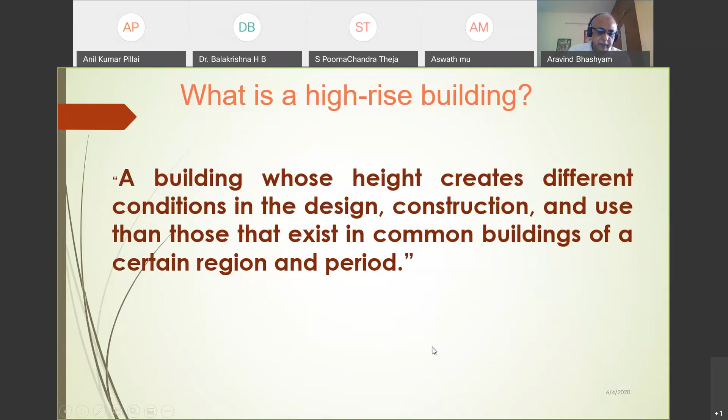So let's see what are the things that we did at that point of time. Maybe it had become obsolete, but it had a lot of impact at that point of time.

Now there is heavy demand for high-rise buildings, basically due to scarcity of land in urban areas, and also an increase in demand for business and residential space. Every country is trying to become a developed one, so there is economic growth, and in addition there's a lot of technological advancements happening and innovations.

Innovations in the structural system, and also a desire for aesthetics in urban settings. Everybody now, especially if you look at Hong Kong, Singapore, or Kuala Lumpur, they have this concept of city skyline.

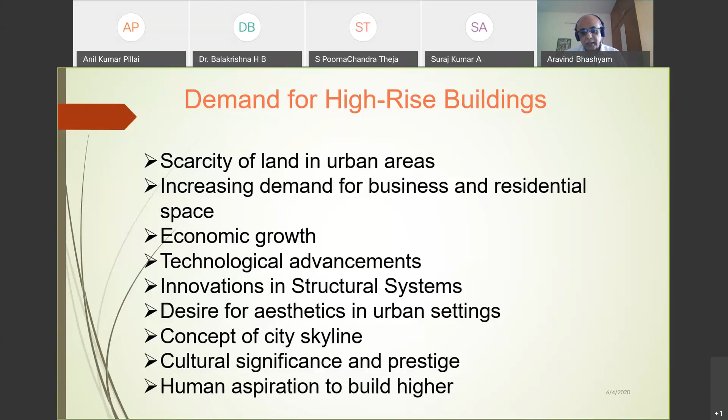You can see in history that the human aspiration is to build higher. That shows their strength - okay, I have a much higher building, so I'm stronger than you. So those kind of things have been there.

Most of us are very familiar with the type of loading that you have, that is the floor systems account for a major portion of the gravity loading, and also they influence the structural behavior and resistance. In office buildings you have long spans, while residential and other buildings may have a short continuous span. We have different kinds of flooring systems: concrete, pre-stressed concrete, steel, and may even have composite steel and concrete.

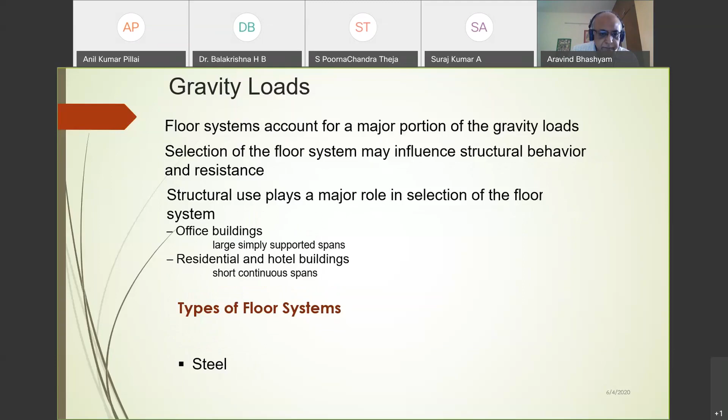You're also familiar with the kind of load that we have, that could be the wind load. Because the building was not tall, we have not paid too much attention to environmental loads like wind. Wind is a very specialized field now - many universities offer a master's degree in wind engineering.

Basically, to understand wind you need an interdisciplinary approach, bringing in fluid dynamics, structural aspects, and even architectural aspects. You will see how it makes a difference. You're all aware of the power law of wind load, how the load varies with the square of the velocity.

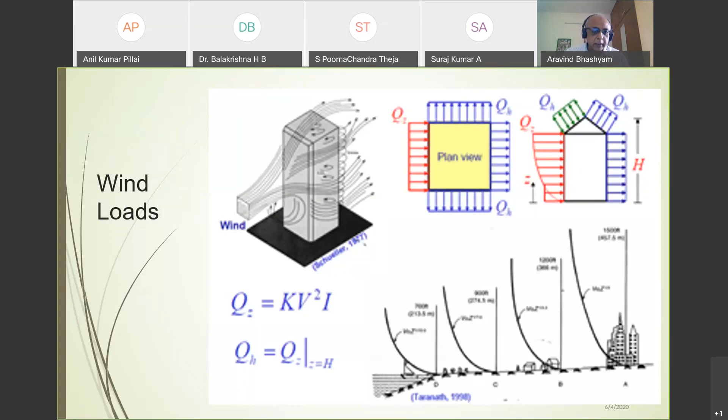I'm not going deeper into it, so any code will take care of that. The most important thing is this was work done by Fazlur Rahman. I would say he is the father of all tall buildings.

You see in this graph that as the number of stories increases, the cost per floor increases drastically. If you have an ordinary building, the difference is about 40 pounds per square foot. That shows there is a premium for height. It doesn't come just like that.

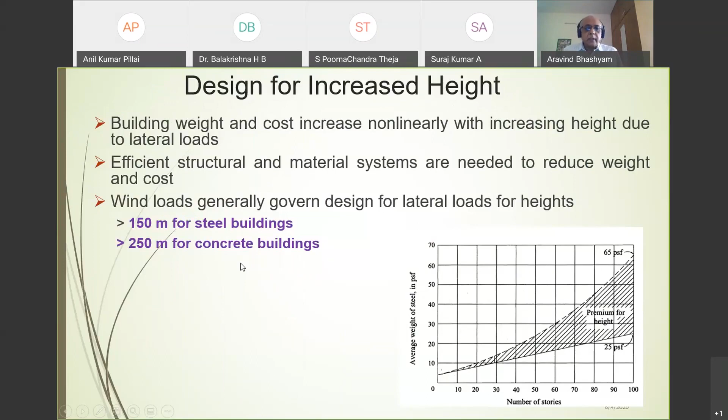You see that with increased height, for a steel building more than 150 meters in height, the wind load becomes the dominant one, and for concrete it is 250 meters where it becomes dominant.

There are various kinds of structural systems for such tall structures. You have a moment resisting frame, brace frame, shear wall system, core and outrigger systems, and you also have tubular systems - frame tube, truss tube, bundle tube. There are various kinds of structural systems you can adopt. Of course, you can make your own innovations.

A lot of things are coming up. It all depends upon how your architectural plan is and what type of environmental loads you have, and how you are going to tackle that.

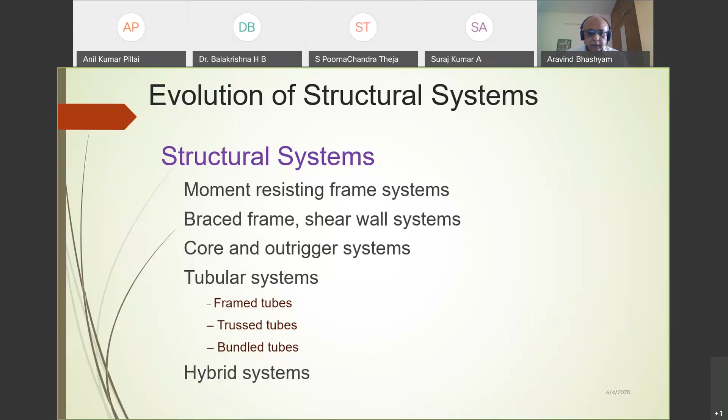Then you can also have a hybrid kind of system. This is Fazlur Rahman's work, which shows different types of structural systems that can be adopted for different heights of buildings, the number of floors. You can have a semi-rigid and rigid frame, then frame with shear truss, frame with shear band and outrigger.

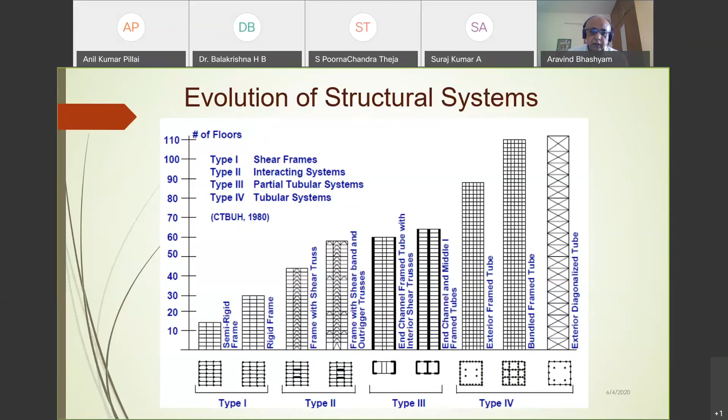Then you can also have a frame tube with interior shear trusses. Similarly, you can have brace frames, and as you go further you can move towards the tubular section. These are the various kinds of structural systems we have, evolved over a period of time.

Now, with this background, let's get into the Petronas Towers. The innovative aspect here is the design and installation of the sky bridge connecting the two towers. That is a very interesting aspect of it, which required careful analysis. You'll see the video later and see how the original design was and how it was modified later.

At that point of time, in 92, 94, Malaysia did not have the technology to do high strength concrete. So one of the requirements laid out by the Malaysian government to this company was that at the completion of the Petronas Tower, they should hand over the technology of making high strength concrete. That was in the mid 90s.

There was no technology to pump concrete to this height, which also demanded an innovative response. That's where a German company came and helped resolve this issue. The next challenge was a highly irregular soil condition, which demanded innovative engineering and construction strategies for us.

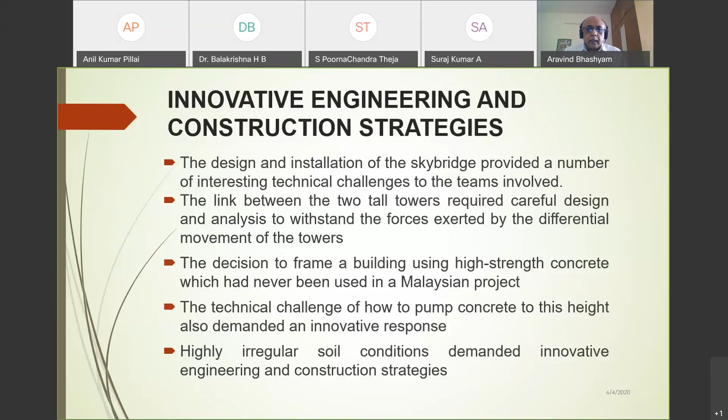This country is located just north of the equator, and it experiences southwest winds from April to October and northeast winds from October to February.

The wind was probably the dominant load in designing the Petronas Tower, because this region is not prone to so much seismic activity, though of late they're revising their maps. Certain kinds of activities had happened earlier, but going to the record, it was never as severe as in Taipei, which is seismically very active - you can expect an earthquake there every minute.

The problem posed was by the subterranean porous limestone cliff rising beneath the sandy and thick soil formation, what they call Kenny Hill - the local term used in Malaysia for that kind of soil. This had a major impact on siting the foundation design of the Petronas Tower.

Actually, the original location was a cricket field, and later that was used as a horse track. So that was the original location.

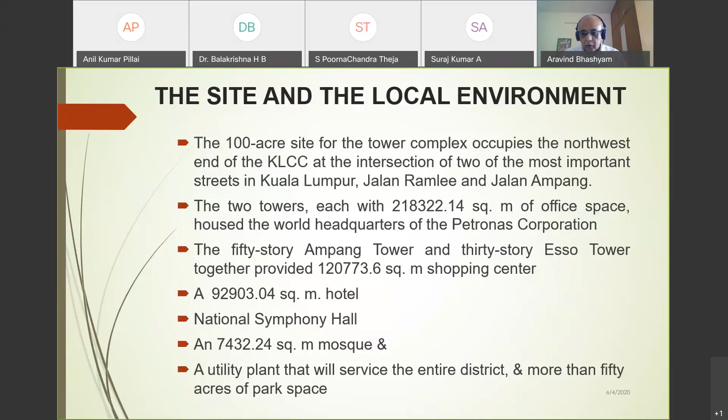It houses the headquarters of Petronas Corporation, the major oil and gas corporation of Malaysia. To support the services, there's a tower next to it called Ampang Tower, with a shopping center, a symphony hall, a mosque, and a utility plant serving the entire district. The whole area can be thought of as a district—huge space, grown up vertically, with more than fifty acres of park.

As I said, the site for the Petronas Tower had to be moved approximately 61 meters to the southwest after intensive geotechnical and geological investigation. We noticed that at the original site there was a porous limestone cliff that dipped down to a depth of about 120.4 meters. This was very difficult for the piling work, because the pile length would vary and could cause differential settlement. Second, the composition of the limestone cliff was also a concern.

At that point we took a call and said, let's move away from this, because it was prime land and the Prime Minister wanted it housed there, as it's sort of the heart of the city. We investigated and found that about 60 to 70 meters from the original site, we could locate the tower, and the piles on which the building rests would not reach the rock. We estimated we'd save about $20 million in foundation costs by moving to the favorable location.

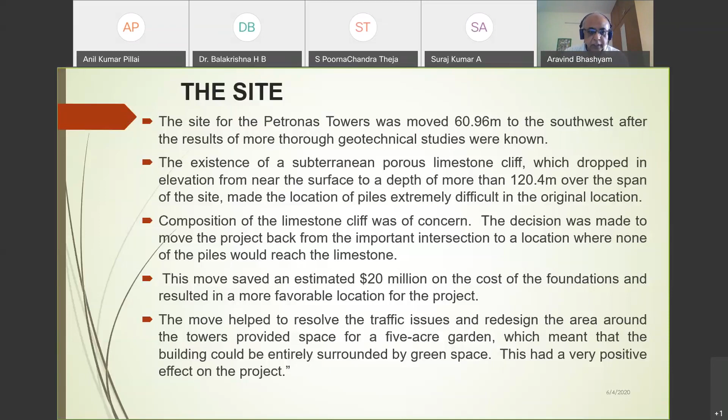This had a very significant effect on the project; otherwise everything would have to go around to reach the site. Also, during concreting, both at the foundation and the tower, we wanted a continuous flow of concrete, meaning a one-way path for trucks to park and move on. There was a specified wait time for each truck, after which the concrete could not be used. So by changing the site location, we addressed some of the geotechnical and transportation issues during concreting.

Now look at the architectural design. It's a delicacy of a local wooden screen combined with the richness of traditional weaving—what is called Songket weaving. It has been cherished for centuries and worn by the royalty of Malaysia.

Cesar Pelli, the chief architect of this building, is from the United States and had no idea about Islamic culture. On the suggestion of Prime Minister Mahathir, who handpicked him, he was told: why don't you study this country and learn more about Islamic culture, to see if that can be brought into this building.

So what he did was tour the entire West Malaysia, and then he got some ideas. He looked at all the specialities of the Malaysians, especially the Songket weavings, and also he saw that 8-pointed star, which was a form used to generate the floor plan of the Petronas Tower. It created a repetitive pattern for the curtain wall, reminiscent of the geometrical forms that we have. It also increased the surface area of the towers and maximized the views. So that's how the whole floor plan evolved.

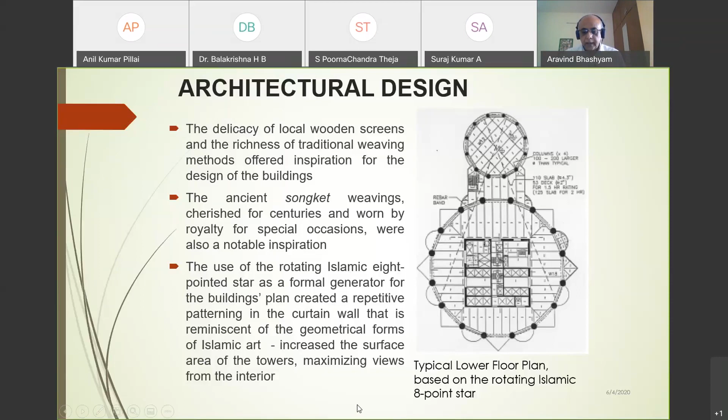You can see these columns here, and then you have the pointed things here. This is the typical floor plan obtained by rotating the 8-pointed star.

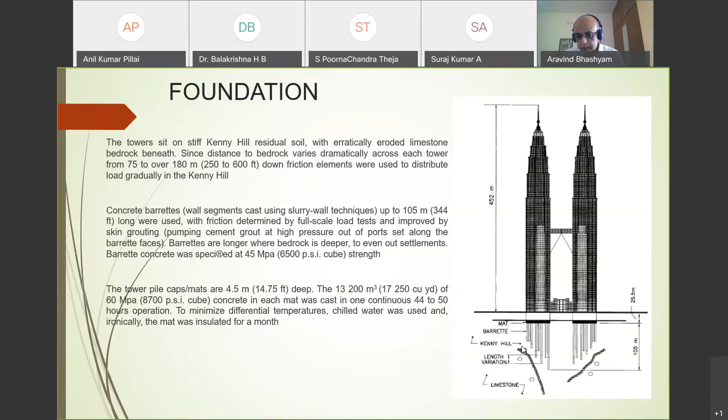The foundation: you can see here that the hill is just sloping down. So your pile will be founded onto this. This is the location of it. It actually cleaves down like this.

So now if you look at the soil and foundation, it has irregular bedrock beneath that. And it has a diaphragm wall about 2.5 feet thick, 30,000 metric tons per tower, spread over this concrete. You can see that the whole thing has been piled. And it has a 2-raft foundation about 15 feet thick, containing about 13,000 cubic meters of concrete. This is how the tower rests on it.

You have 208 barrette piles, rectangular, 9 feet by 5 feet, ranging 197 to 380 feet, to control settlement. The length varies because of the dip in the cliff.

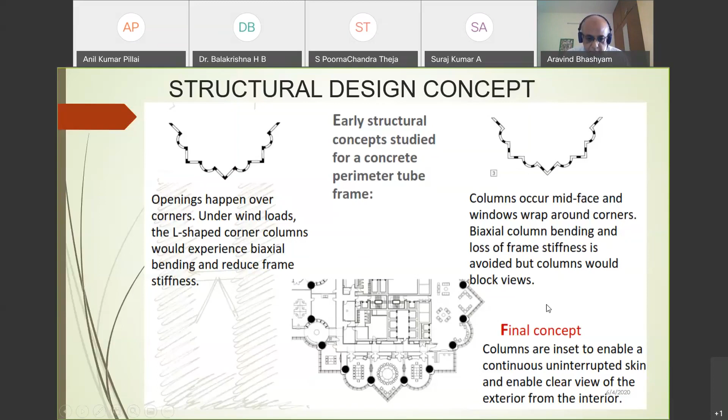So what we did was have the column move around like this, rotating this circle, so you get columns like this. When you rotate it, I can have at this junction the column project out so that this is open to the view, and you can have facade here in this region. That's how we evolved a structural form by rotating the star and placing the column onto this.

These are circular columns around us, and then you have the shear wall inside. Now the one core central unit is for the lift and tower exits and mechanical services, etc. It has the bustle stairs and non-structural walls, and there would be less effective cores along the top. So that's how the structural form evolved.

Now you see that the form that evolved formed a soft tube. Many times we neglect the in-plane stiffness of the floor slab, but it has a tremendous in-plane stiffness that can be used to resist the lateral stress. So this is what we made use of in order to resist the lateral loads on this.

So we formed soft tubes around that, and we also had that kind of floor slab placed around. At this point, the column was sloped inwards, and I'll show this a little later how it was done. The tower is supported by 16 cylindrical columns placed in the inner corner in a star shape, and it steps back 6 times. You can see here, it steps back 6 times.

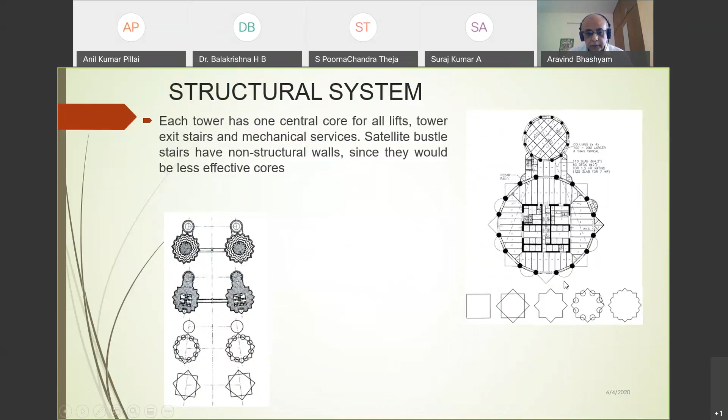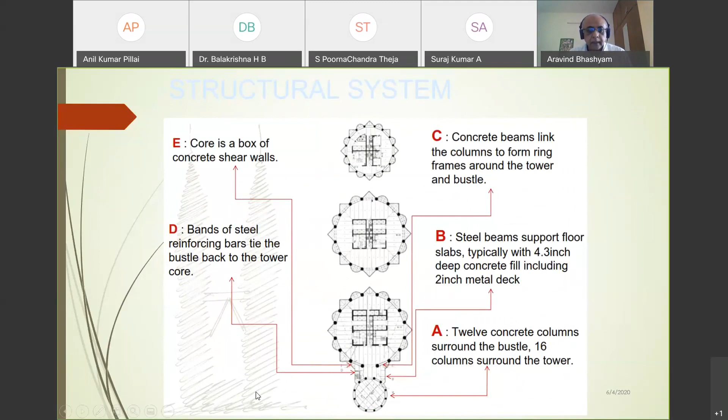You can see these are the steel beams running around this. This is composite in nature. And you have this column supporting this. So this is how we evolved this tower and the adjoining one into this. Now this is where we had the core shear wall around that. So this is how the whole structural system was formed.

But in that, I need to cater for the wind load also, that is a prominent one. If you look through this structural system classification for tall towers, there are a lot of papers published, but the important ones are by Fazlur Rahman, and the other one is by M.M. Ali.

M.M. Ali is also from Illinois Institute of Technology. What you see here is they classify the structural system as external and internal. When you design a multi-storied building, you design such that you don't differentiate between lateral load and the gravity load — the entire load is taken by the framing system. This is okay as long as the height of the structure is okay. But as the height increases, the same kind of system may not be possible. So we try to see the separation of this — having a separate structural system for the lateral load and the gravity load, and somehow interlink them so that it helps.

So here we use the concept of the outrigger. This has been there for a long time, especially when you look at boats. They have these outriggers, which tend to balance the boat as it's considered, spread out, giving stability to the boat as it travels through.

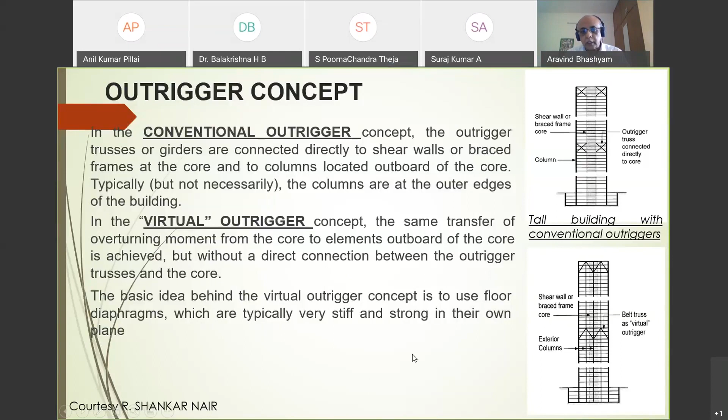So the idea behind this virtual outrigger concept is to use the floor diaphragm, which is stiff and strong in its own plane. That's why I said we have taken the in-plane resistance of the slab into account to render this. This was the idea given by Shankar Nair, who is in the US, so the same idea is being used here. So there is an advantage of using this kind of belt truss.

You can see here, this is a floor diaphragm. These act as the bottom chord, and this acts as the top chord, with members in between which get connected. So we need to locate the outrigger columns where they can conveniently engage with the truss. That's the advantage of this.

And when it is braced, this is where the transfer of forces takes place between the floor diaphragm and the shear wall or braced frame. The complicated truss-to-core connection is eliminated here. And if there can be differential shortening or settlement between the core and the outboard column, this outrigger is able to balance that because it is stiff in its own plane. That is the advantage of it. But on a vertical plane, it is very flexible.

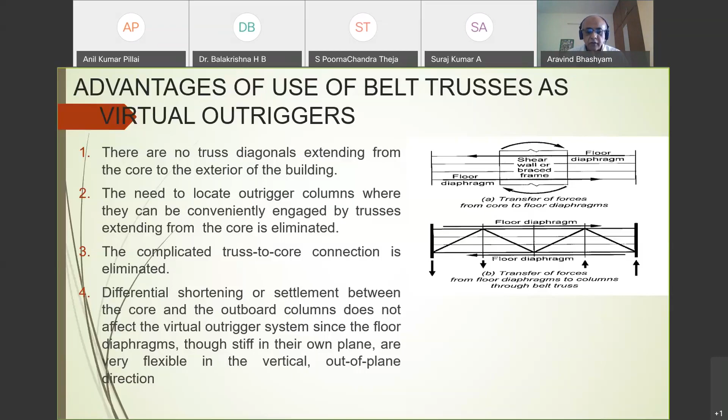We wanted something to be in plane, and it should be very strong so that it can transfer the forces. At the same time, vertically, it is flexible enough to do that. So that's the advantage of this.

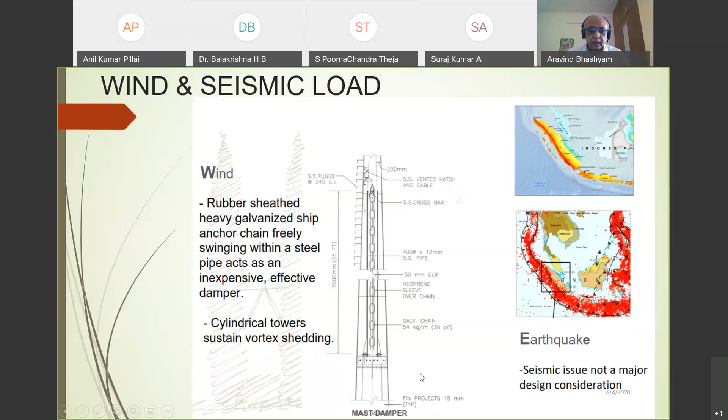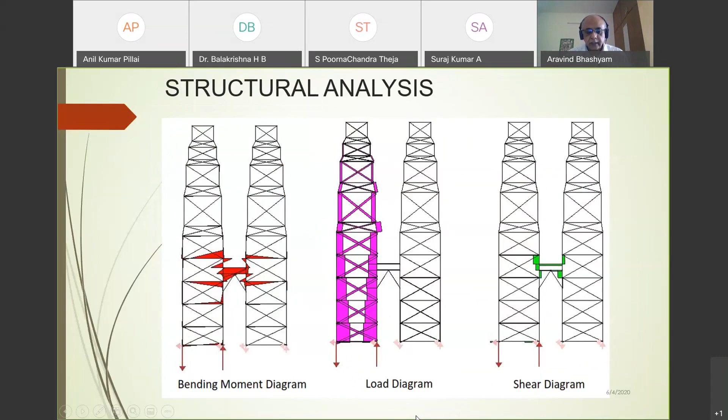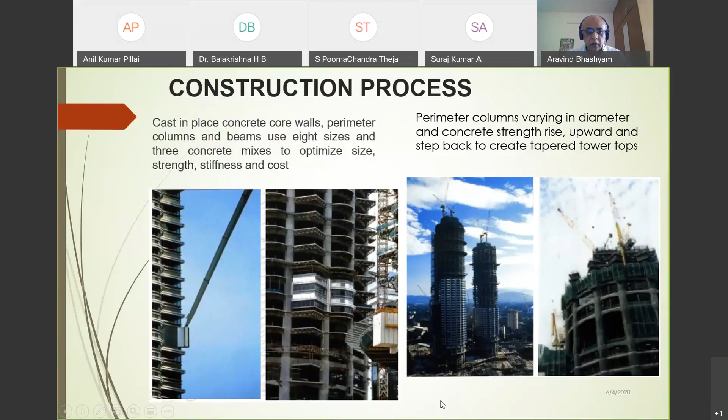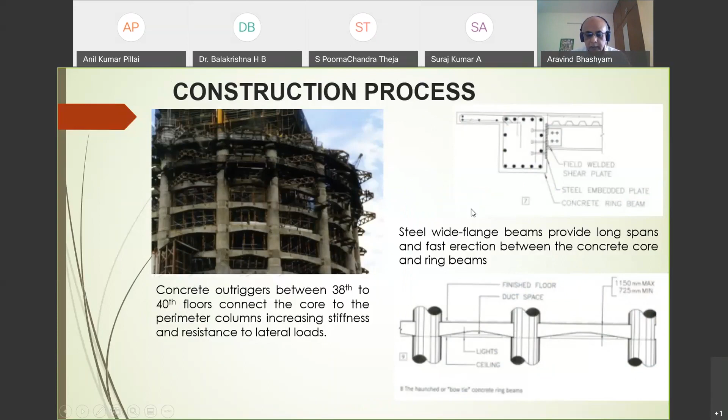The concrete outriggers between 38 to 40 floors connect to the core perimeter of the column. So that increases the stiffness of it. This is basically how it was detailed.

Now, coming to the whole concept of this tower, the initial design was we had 2 towers with a space between the two. So the architect looked at it and said, somehow I need to bring harmony between these two towers, because they can't stand separately. He said, I'm looking at the sky, I'm looking at the universe, so let me have a way of saying that. Let me connect these two with a bridge. That's what he wanted - come up with an idea of how these two can be connected with a bridge.

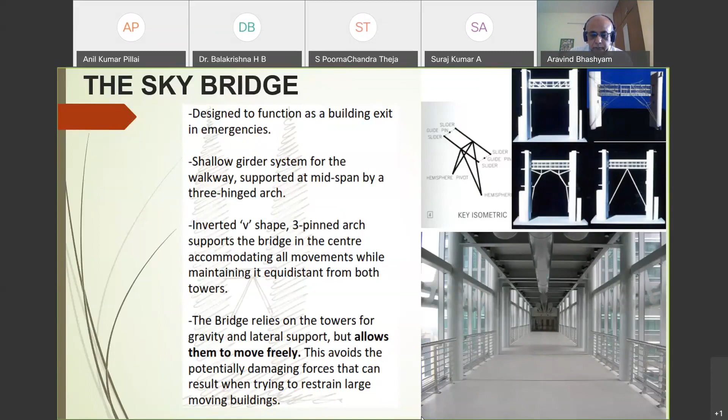So now you need to have a bridge which would allow the free movement of the support. That means I need to have a hinge here - you can have a hinge or you can convert it into a 2-hinge arch, that's also a possibility. So what we thought was, why not make it a 3-hinge arch principle, so this is on a hinge, this is on a hinge, this is on a hinge, connected here, and this abuts the tower but is not really connected to it. So if the tower moves in different directions, this bridge will remain as it is - it will not be twisted.

So each leg of this spans from a spherical bearing, which allows the rotation. You can see here, this is how it is.

It rotates the whole thing onto that spherical bearing that you have. And the wind forces are important for this design consideration, not only for the design but even during the erection.

You'll see what kind of problems we faced during the erection. So this is how the structure was conceived. We had three tuned mass dampers inside the 34th and 35th floor in order to reduce the vibration of the leg.

Basically it's an external damper fitted into the leg. So what happens is beyond a certain frequency of wind, the dampers become active, they absorb that energy, meaning they dissipate it so that the leg of the bridge is protected. That's basically the idea.

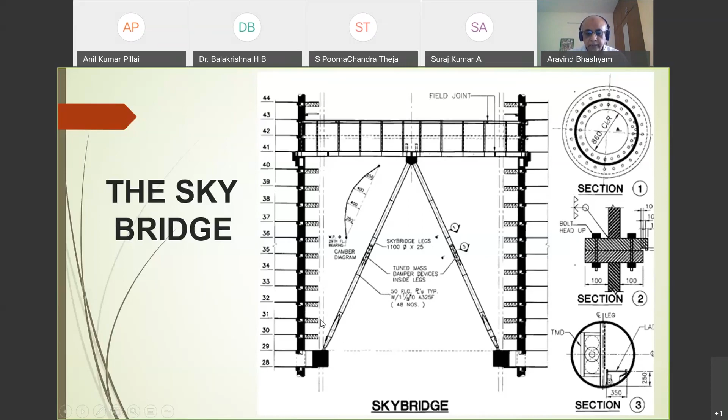So it's a double-deck bridge spanning 58.4 meters, connecting the two towers at the sky lobby elevator. Structural steel was used as it's easier to make and then transport to the site. We used two-hinged arch and continuous floor girders—it's a shallow walkway.

We have done tests for fatigue and also for loss of support, creep and shrinkage, and certain movement compensation that can happen, as well as for the bridge facade panel movement. All these things have been studied, and finally we arrived at the configuration of the bridge.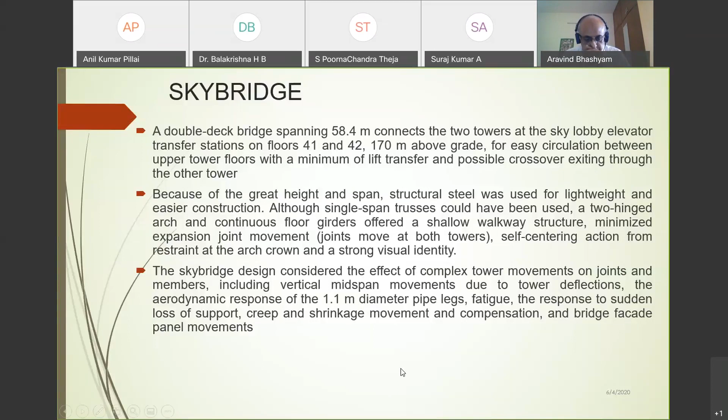Now I'll show the video of the erection of the whole thing.

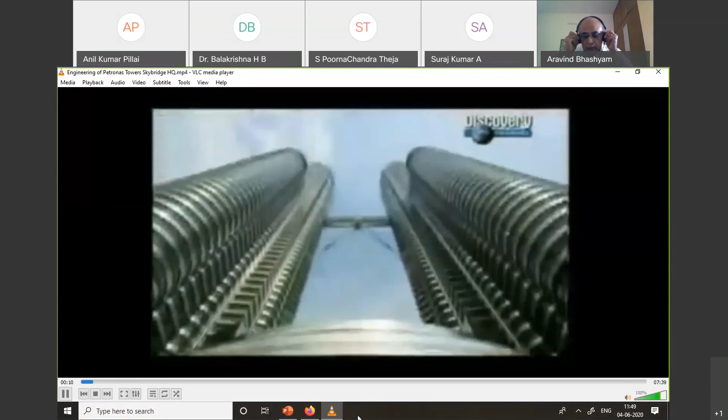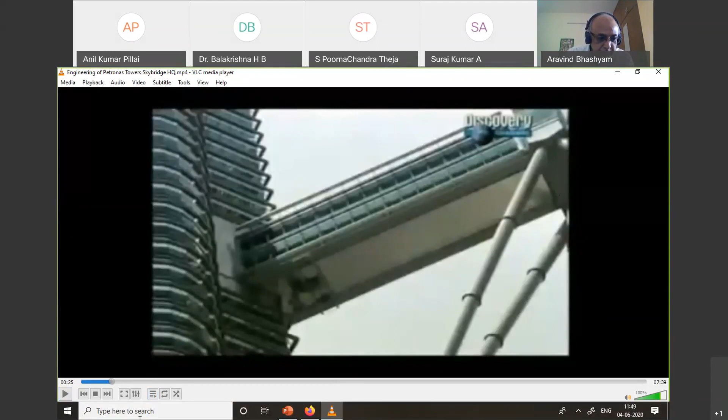This is actually the view of the Petronas towers, which shows the sky bridge. This is the leg which I said is broken into pieces and then assembled at the site. Now you can see how this whole thing is being developed here, with a bare steel frame around this.

Now you can see this is the leg which is coming here. It is fixed at this point, it is at the support, and it's supported. It just abuts the tower at this point and the tower at this point, and you have the glass facades covering all this. So this is basically a box, supported at these points.

Now, this bridge has a functional role in the sense it's connected to the towers, and it also acts as a visitor gallery. As it moves around, they can see the whole thing, the entire Kuala Lumpur city.

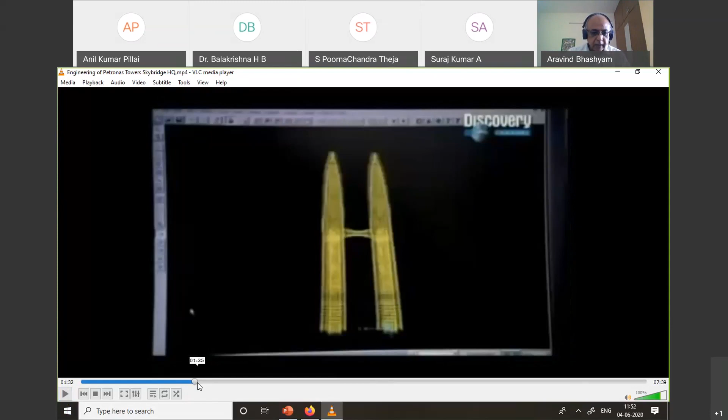Now this is the simulation of the tower. You see that the tower can move, and this allows you to twist the bridge. You can see the twisting of the bridge.

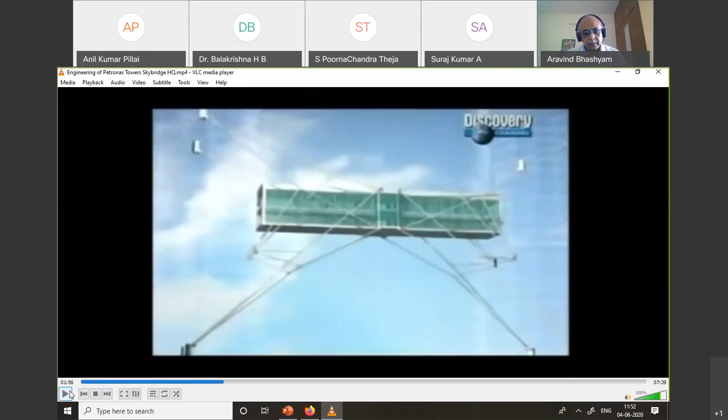But there is a gap here. Probably you can make it cantilever from this side, abut it at this point - absolutely no problem. But the whole problem is when the tower moves in two different directions, those regions get stressed more, and this causes the bridge to twist, because depending on the movement, one side can shorten while the other lengthens, or vice versa, and this causes the twisting of the bridge. If you have to design the bridge for this torsional effect, it would be pretty heavy and very uneconomical. So we looked at various alternatives.

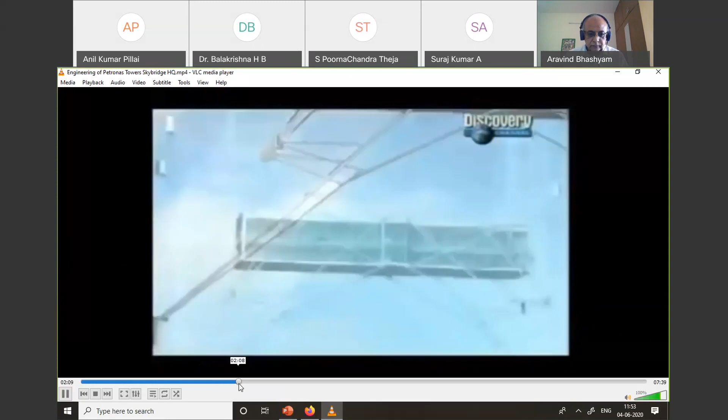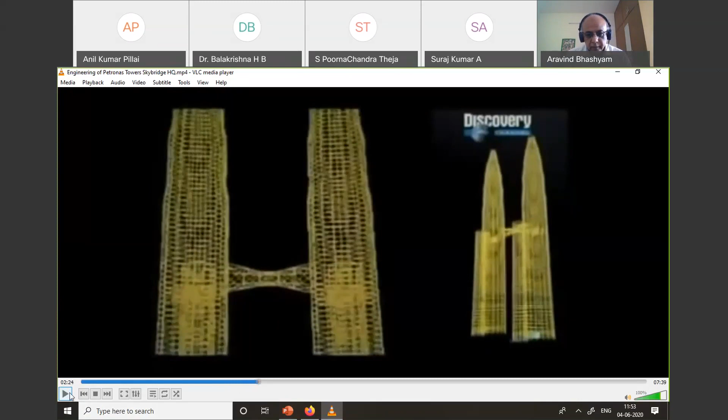Probably you can see the movement here, how the bridge is getting twisted.

So this is how we changed the design. Now you can see that at this point, just above the bridge, the tower has a fixed support. Then it comes down and rests on a socket ball bearing here. These are the various segments which can be assembled on this side and fixed.

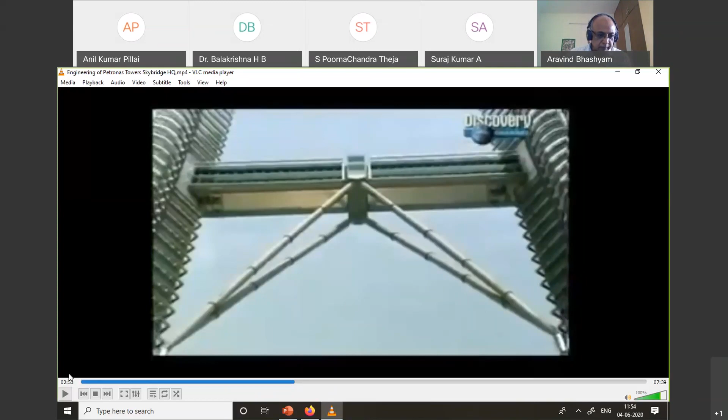But how am I going to fix it at this point and this point? What technology am I going to adopt? Suppose I fix it up to this point - how do I bring this to this level and fix it here? I can't stand in the air and bolt it in place. So we had to do some kind of simulation to figure that out.

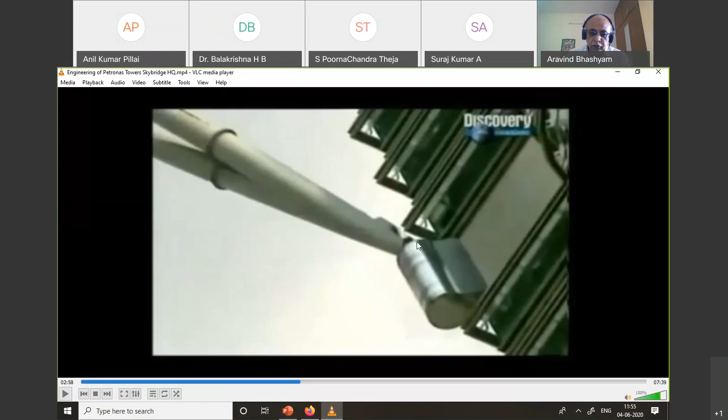Now you can see how the bearings work. This is the end bearing resting on this, which transfers the forces to the column, and then through this frame it goes here, where it's allowed to swivel about that particular joint. It moves around that.

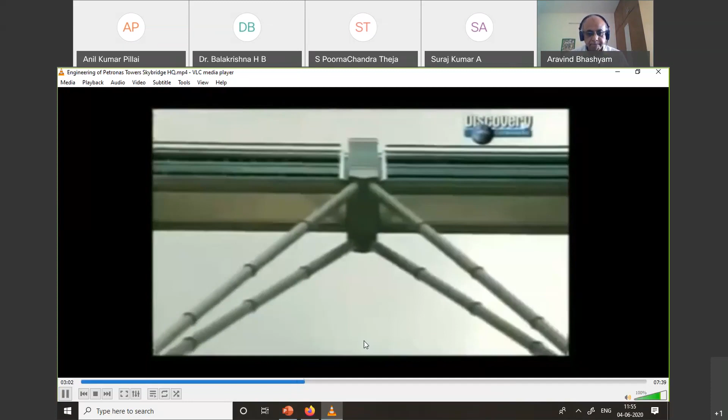So what he's trying to say is this is what we worked out - you have a bridge and you allow it to move so that you don't put strain or stress on the bridge. The tower moves freely, so the bridge also just slides along with it. It doesn't move along with us; it's able to slide. That's how it was done.

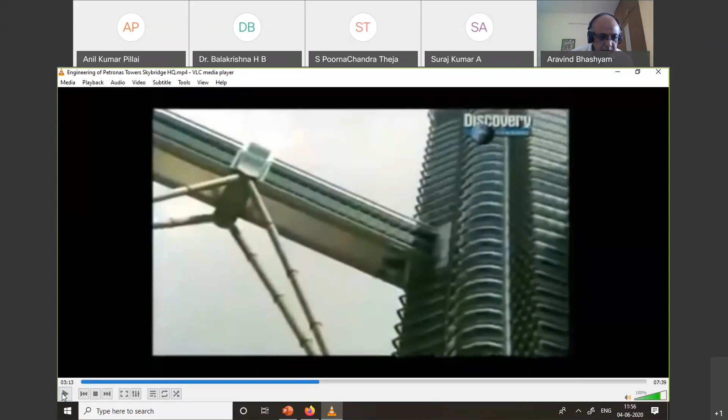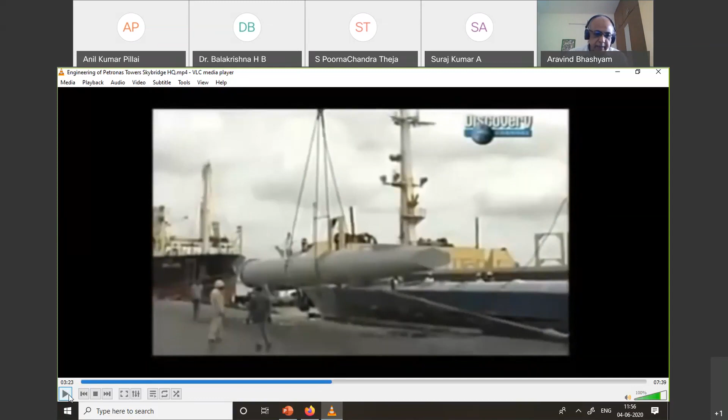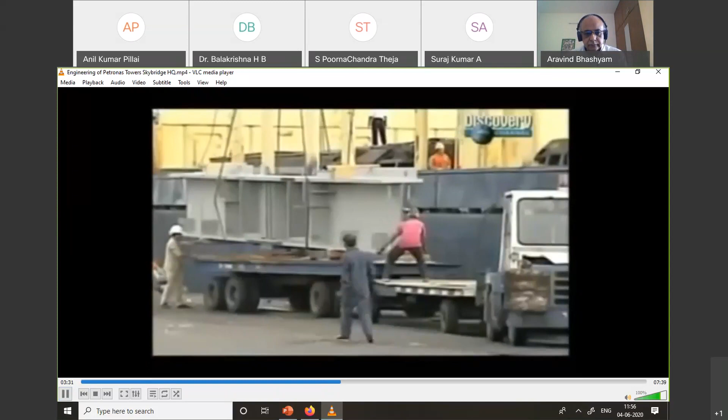These are the legs of the bridge, which were fabricated at Seoul, South Korea, and then shipped to Kuala Lumpur in pieces, where they were assembled at the site. The next important thing is when you break it into small pieces, make sure every element fits properly, with no hiccups when joining the elements together. That has to be ensured at the site.

Now this is what we did - this was assembled, and through the hydraulic jack, the bridge was lifted up to the height of the 41st to 42nd floor.

Then you bring it back - the legs which are there, you see that leg attached, you push it back and connect it here. Now, is it a simple exercise? We'll see.

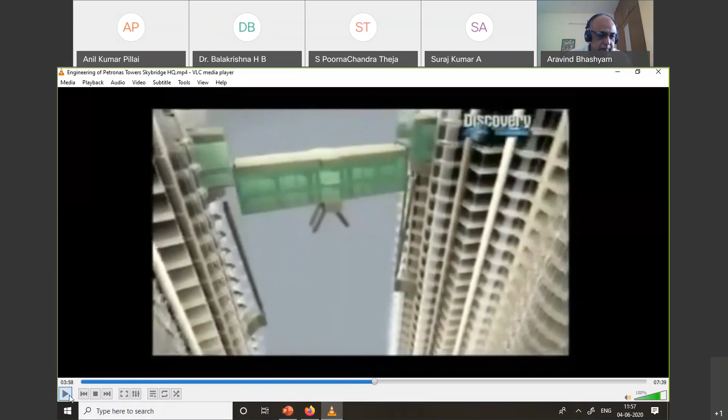So the whole idea is the joining will be done in mid-air. How are we going to do that? What kind of support are we going to have?

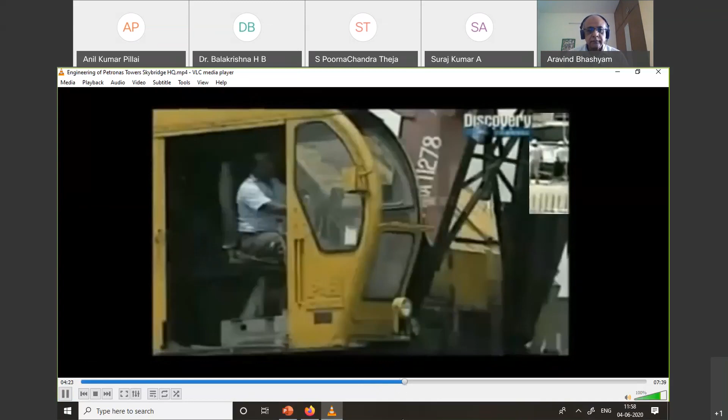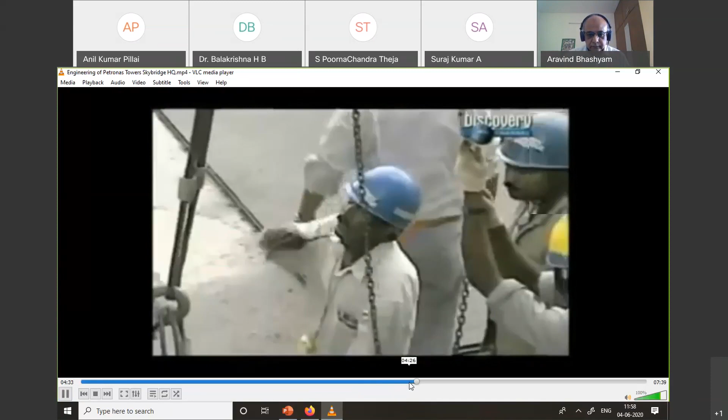So we divided the Sky Bridge into 5 different sections, and at the site we assembled these 5 different sections together, and then it was lifted to that position.

So these legs are 51 meters long, which are attached to the bridge, and this is lifted up to the point where the bridge needs to be at. Now the bridge is just located, it's held by the cranes in that position.

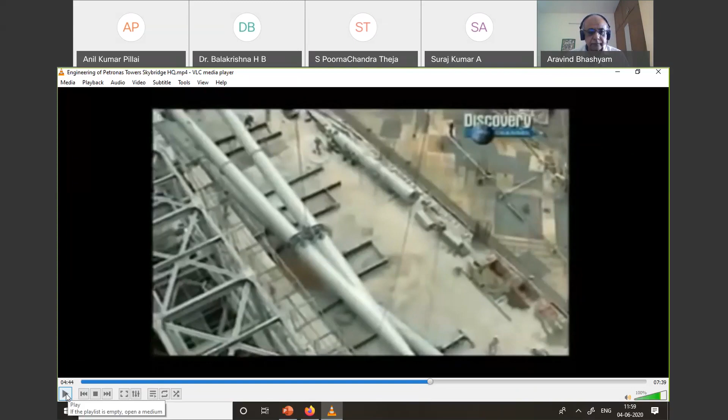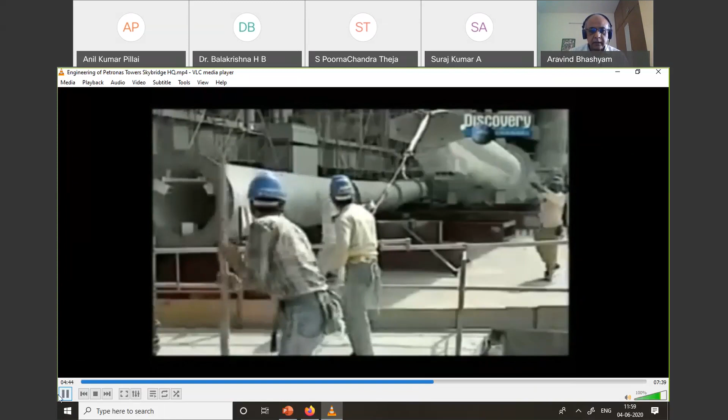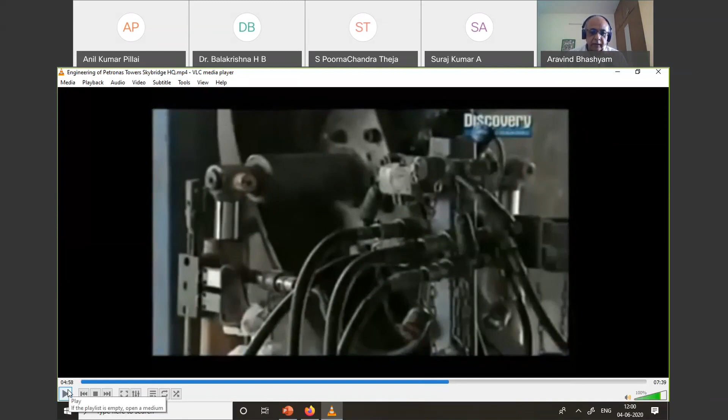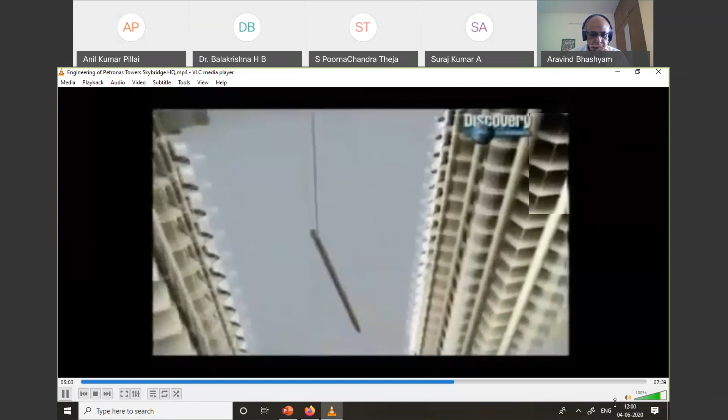Now, each leg weighs 60 tons. This has to be lifted up, and then we have to join it in mid-air. So at level 29, this bridge is being lifted up and placed in position. What you can see here, this is placed into the joint.

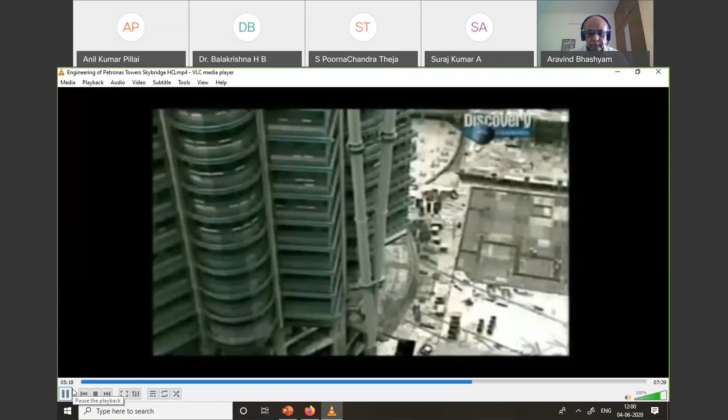This is going to be placed in the joint. Now the legs are being placed and they're held here at this point. Now the bridge is in position with the 40-meter leg. The vertical leg has been lifted up into its position.

Now comes the major and critical operation: how do we bring the legs together and connect them at mid-air?

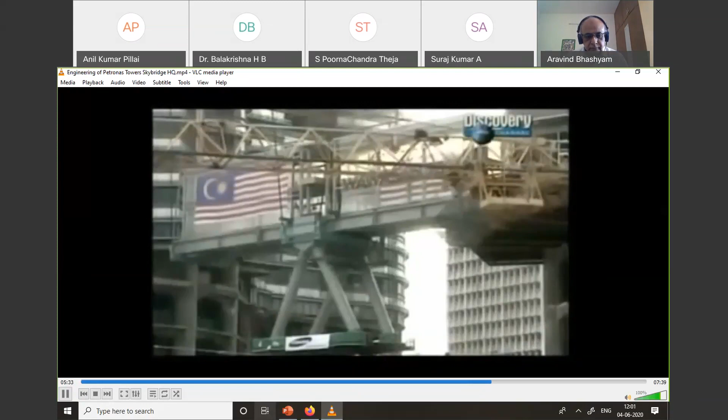So this was done with the help of the computer, so that we initially simulated this, then we started using it. Now the rate at which this is being pushed is about 12 meters per hour.

And we want a clear sky to erect this so that we don't have a gusty wind to deal with. If there is rain, it's going to hamper our process. We don't know whether the bridge will remain in position or if it can collapse. If it collapses, it's going to damage the entire tower, and it's very uneconomical to rebuild it again.

So these are the constraints that we have, because it can hit any point of the tower when it is trying to collapse, that's being held with it. And it can sway now because of the wind, because this central bridge is held by the cables at the top, and this can swing. It's like a swing now. It can move around because it's very lightly connected to this.

The connection will become tighter only after the legs have been pushed into position, because any adjustment that you need to make here can be done, and then later on it can be made to abut with the towers.

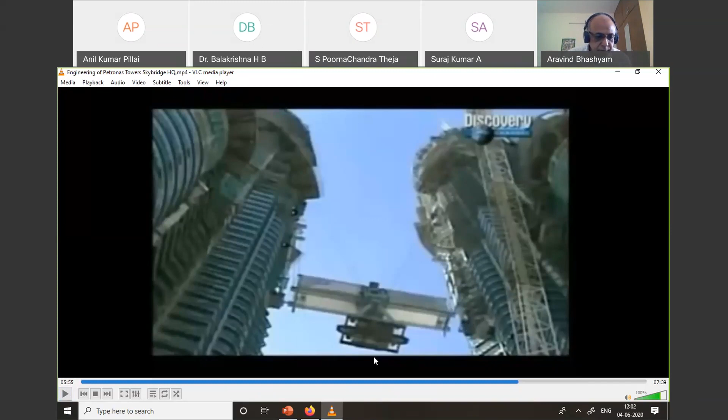This, you can see the cables holding on to this. We estimated this should take about 30 hours, working day and night to bring this.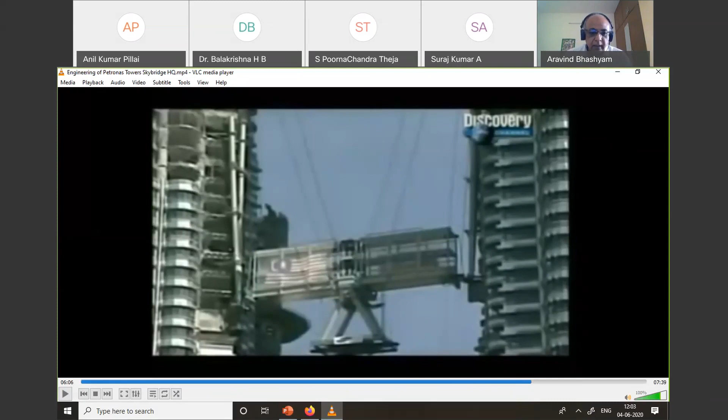Now you see that the people working in the design office, are they really aware of these kinds of problems that you face in the construction field? So any design which is good has to be constructible, that means there should be a way to construct that. So that's exactly what we are trying to aim at with this.

So as soon as we started, after doing it for about 2 to 3 hours, we had a torrential rain pouring down. We couldn't do anything.

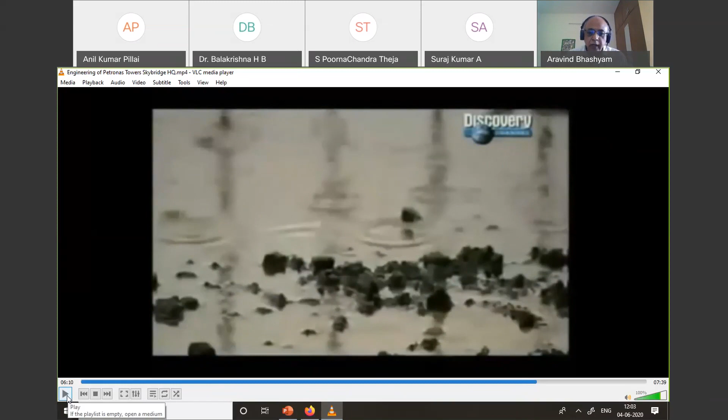What happened was the cable that is connected to the computer failed, and the computer started to malfunction. So we couldn't erect the bridge, and everything was held in that position.

It is very dangerous because anything can happen. The vertical leg can come and hit the tower. So there'll be loss of life, there could be damage to the entire tower, and all this can happen over there. We didn't know what to do at that point of time.

So the only alternative that we had was to stop the erection of the bridge. If we stop the erection and there is a strong gale, there's every possibility any kind of accident can happen. The only thing that we did was pray. That's all. We'll wait for the storm to abate.

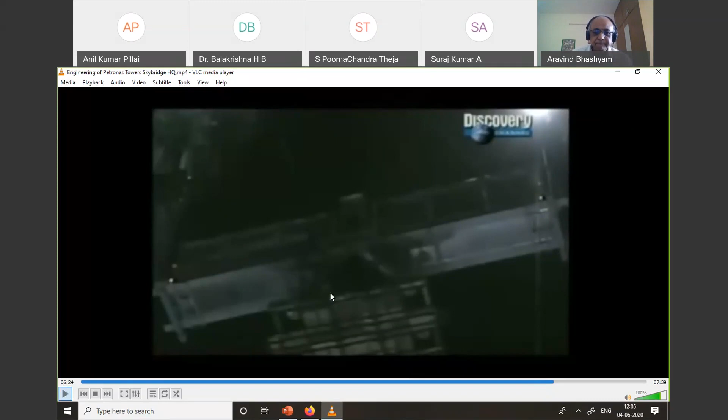So we were erecting the bridge, and because of this torrential rain, there was a fault in the cable, which was supplying power to the main system that was monitoring it. So all of a sudden, at this height, the erection stopped because the computer failed. The hydraulic jack didn't know what to do, so it stopped functioning. Everything came to a standstill.

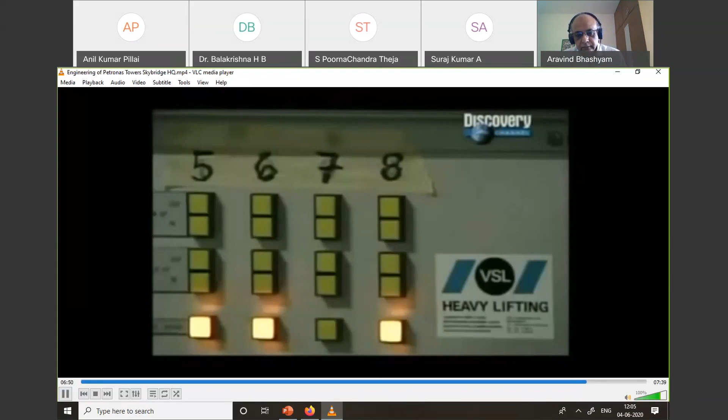So now this section is dangling, and you have a problem with this. You can't take a chance now, anything can happen to that. So the one way is to locate the fault, get it rectified, whether you have torrential rain or not, it doesn't matter, you have to get on with the work and complete that.

So what we found was that the cable failed because it was struck by lightning. So we had to locate where the cable had failed, and then repair it.

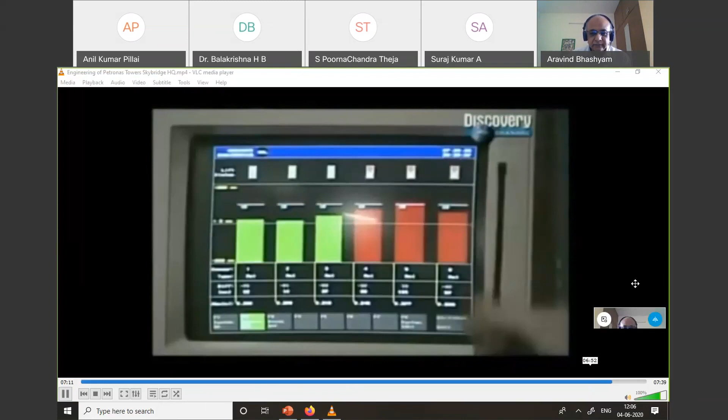So once it was rectified in the night, the bridge reached this height. Now you can see the lights here. This is where we are ready to bring it to position, but this is what is hanging there. How are we going to do that?

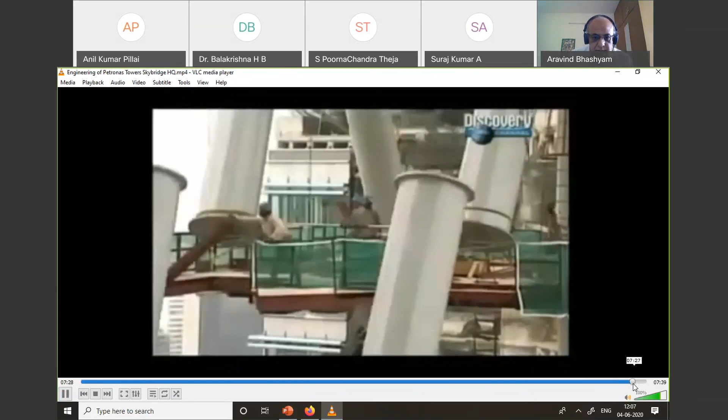So can you see that slowly this was moved to this temporary platform, was dropped from there, and this has to be welded onto it, bolted and welded to this. You can see that operation.

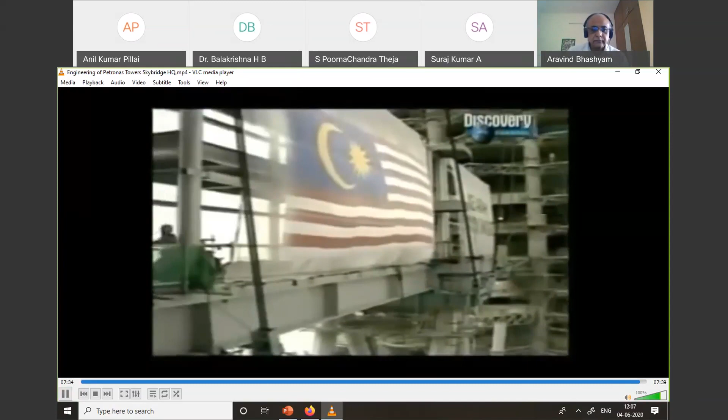So what you're seeing here is the erection of the highest sky bridge in the world. That's the reason why it was recorded as a man-made miracle.

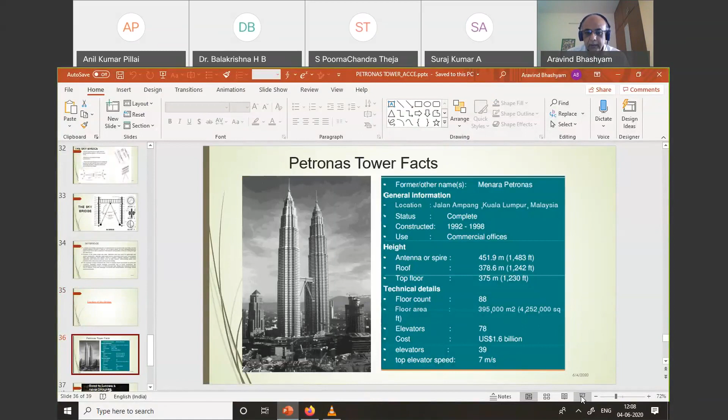So this is the basic details of it. After the completion, it was completed in 1998 and is used for commercial purpose. Antenna, the spire, earlier the original design had no spire on top of it. Since we wanted to make the building the tallest in the world, we had to add on this spire. This is 378 meters to the roof, and the top floor is at 375. At the 84th floor, you have the machines to clean windows, the window cleaning machines and all that.

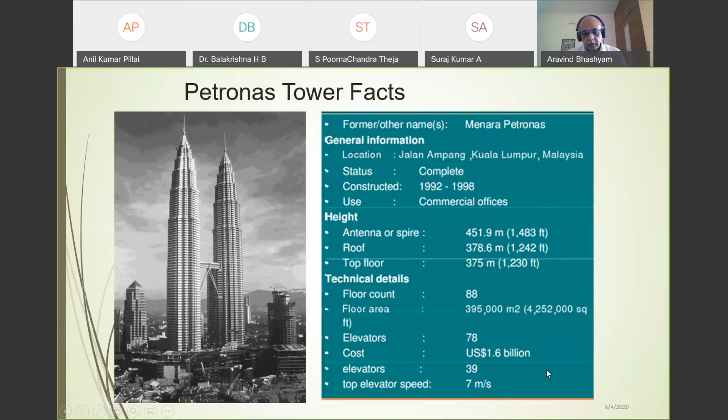We dropped an arm down. So wherever you have the outrigger, there we have the window cleaning machine. We dropped the arm down and cleaned up that whole space. The total cost was 1.6 billion.

So this is what it is, that only those who dare to fail greatly can achieve greatly. This is what we saw from this. So thanks for your time.